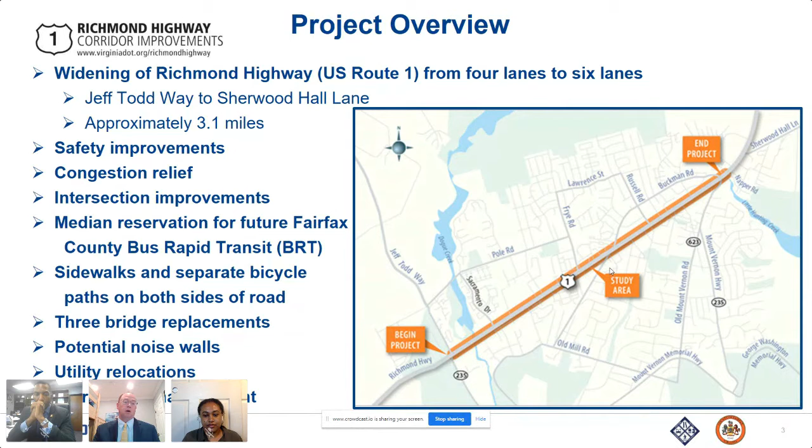It also includes separate sidewalks and cycle tracks on each side of the roadway. We're including 3 bridge replacements, potential noise walls, overhead utility relocations, and stormwater management facilities throughout the corridor.

So it was March 2019 that we had a design public hearing at Mount Vernon High School. Since then, we've developed written responses to all the comments that we got at the design public hearing. So thank you for anybody who submitted a comment. We've incorporated minor design adjustments from all the comments that we received from the public, as well as some internal comments. We have been out meeting with property owners.

This is a time for me to give a plug. If you have not had us out for a meeting and you're a member of an HOA or a civic group and would like to have us come out and give a presentation, please get a hold of me, and we are happy to do that.

We have been working on right-of-way plans for full property acquisitions, as well as conducting title research to lead up to notice to proceed on our right-of-way acquisition process. And we've been advancing the plans from the 30% level to roughly the 75% level.

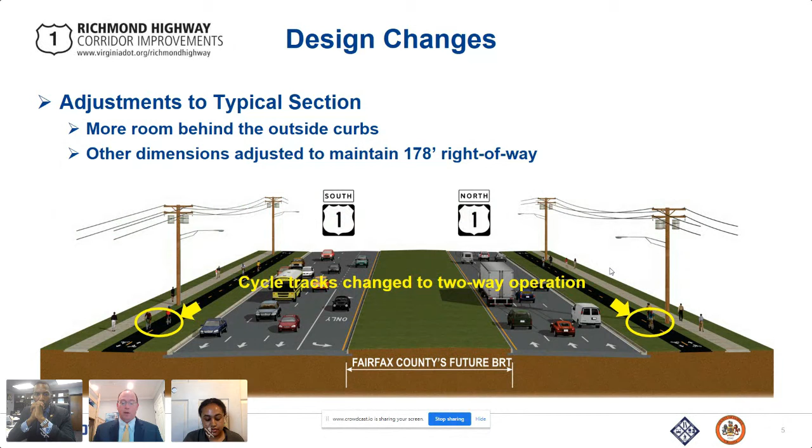So there's a couple design changes I want to highlight for you tonight. The first is one of the major comments we got at design public hearing was that single direction cycle tracks, one southern direction on the west side of the road and one northern direction on the east side of the road, was not sufficient, particularly if you were making short trips on a bicycle, like going to the grocery store. So we have incorporated that comment into the plans. So we now have one 8-foot cycle track on either side of the roadway that will be bidirectional.

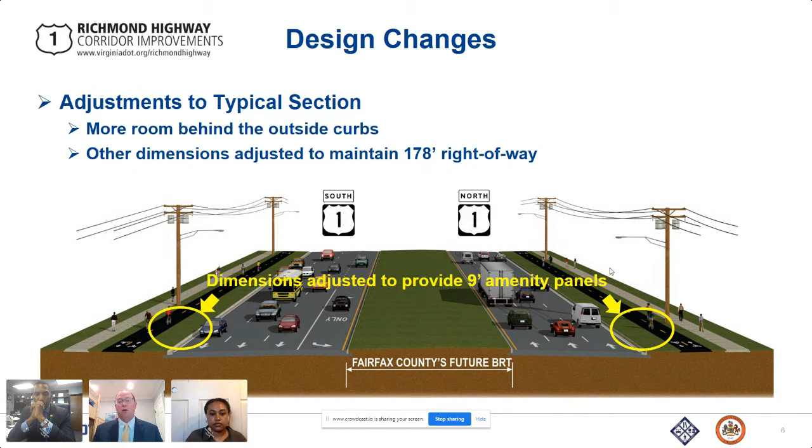Another change is in trying to realize the vision of the Embark Comprehensive Plan Amendment. We had 8-foot amenity or buffer strips behind the curb on each side at the design public hearing. We've expanded those to 9 feet to allow for larger trees to be planted along the roadway in conformance with that Embark vision.

I want to talk about some schedule revisions that have occurred since the last design public meeting. The project is roughly 1 year behind schedule as of right now. One of the major factors is we were anticipating receiving a finding of no significant impact last year. That did not happen, and that has been delayed, and that has impacted the rest of the schedule, particularly the start of the right-of-way process. So that's put us a little bit behind.

Going forward, as we've advanced the plans, we've looked at the right-of-way and utility relocations. What we showed at design public hearing was a high-level assessment of the parcels that were being impacted, and we based that on judgment. We had 3.5 years allocated in the schedule for right-of-way and utility relocations.

We have taken another look at that based on the additional information of advancing the plans to 75%, as well as some of the detail that's involved in some of these properties. And we've determined that 3.5 years just was not adequate. And it's going to take roughly 6 years for right-of-way and utility relocations to be completed if we proceed in the manner that we had originally proposed at the design public hearing. So that was not something that we were excited about. So we took another look at ways that we could recover the schedule.

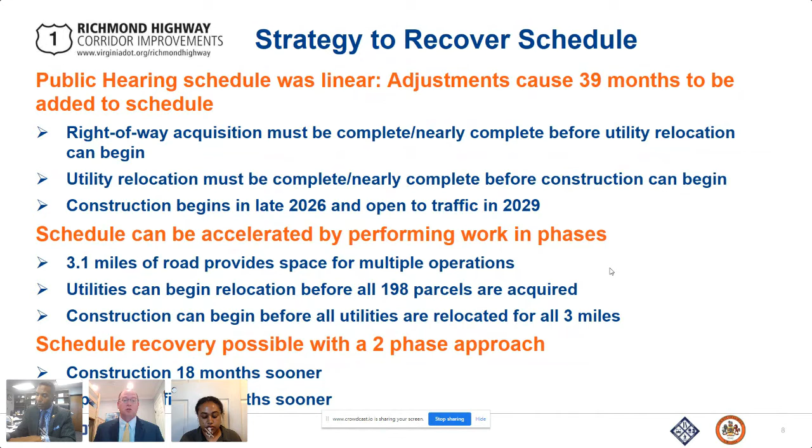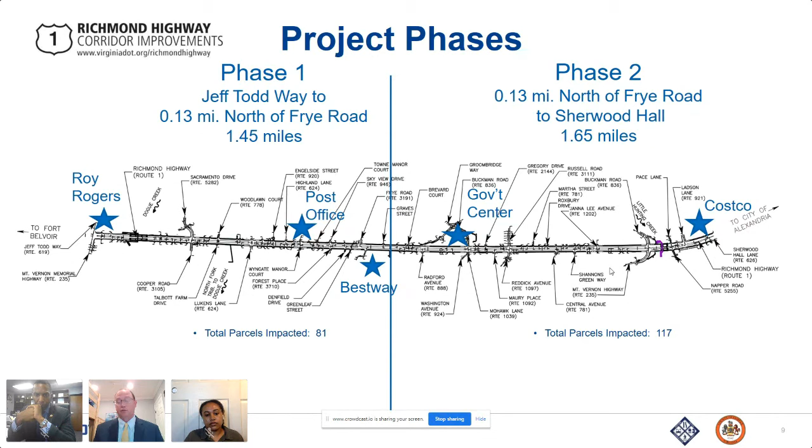So these are the 2 phases that the project will be broken into. Phase 1 is from Jeff Todd Way to just north of Frye Road. Phase 2 is from just north of Frye Road to Sherwood Hall Lane. They're both approximately 1.5 miles. You can see down at the bottom the parcels impacted in Phase 1. There's 81, and there's 117 parcels impacted in Phase 2. And so when we say impacted, that's some sort of right-of-way acquisition, whether it be permanent fee or temporary or permanent easement or just temporary construction easements.

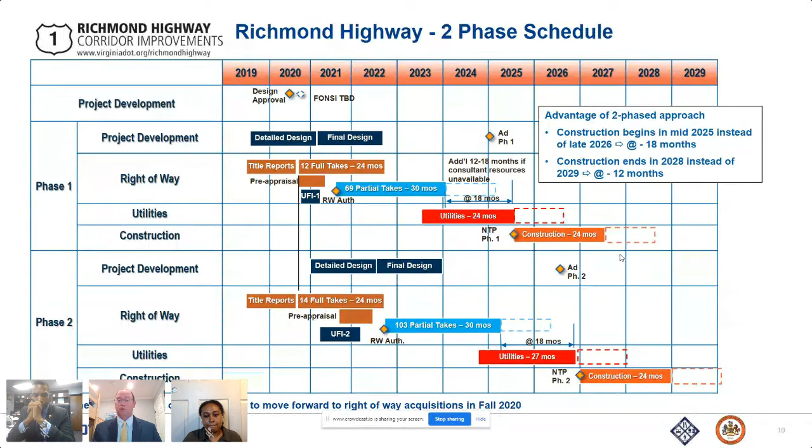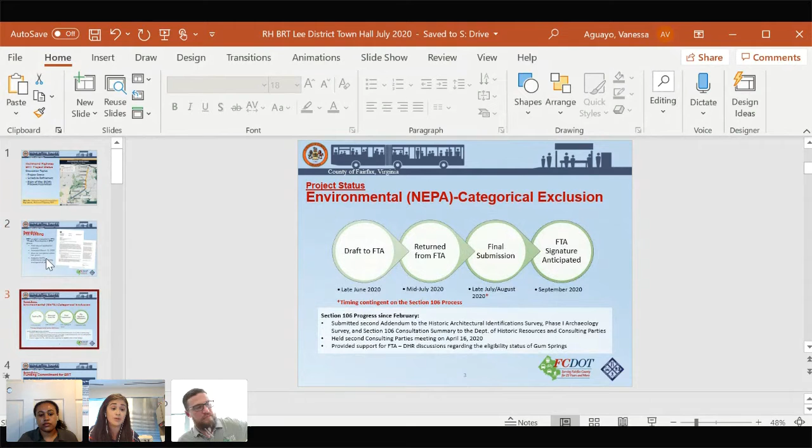Where we are with public involvement, we do have an email blast list that we use for anything related to the project. We did send out a newsletter on April 1st of this year, and given the health situation, we were planning to have a March-April timeframe meeting to talk about everything that's going on on Richmond Highway. That was going to include BRT, the VDOT Widening Project, and our Department of Planning and Development's urban design guidelines. But since that situation, we have deferred that meeting.

But now we're looking at other opportunities for virtual meetings. So whether we do something like this or a live or recorded presentation, we're looking to do something maybe in late July, and depending again on the health situation, potentially have an in-person meeting sometime early this fall.

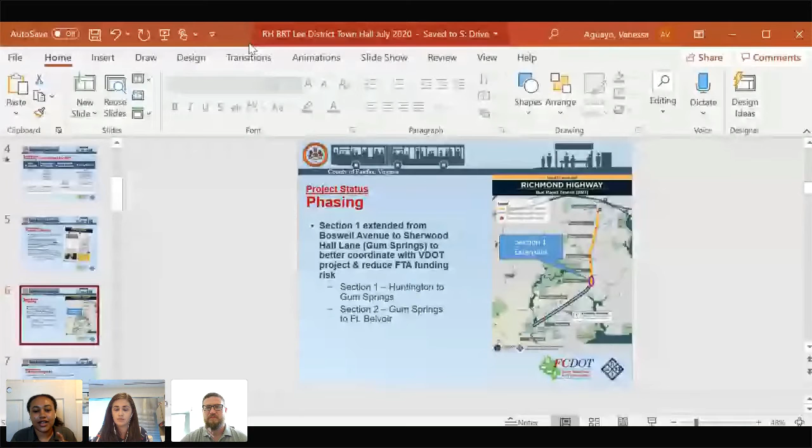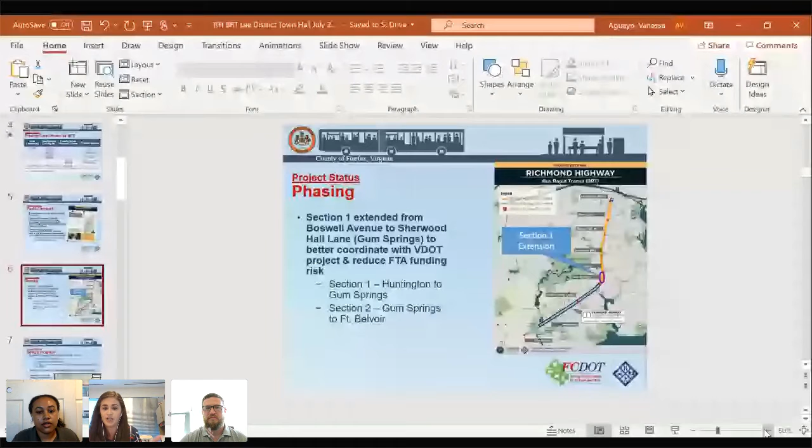Hey, Vanessa? Yeah. Sorry, I didn't mean to interrupt you, but could you make the screens full screen? I think the audience is having a little bit of a harder time. Yep. I could try. Is that better? When full screen, it wasn't letting me change it. Will it let you go into presentation mode? It got stuck last time, but I can try it again. Now it works. Okay, let's try that one more time. Okay, no problem.

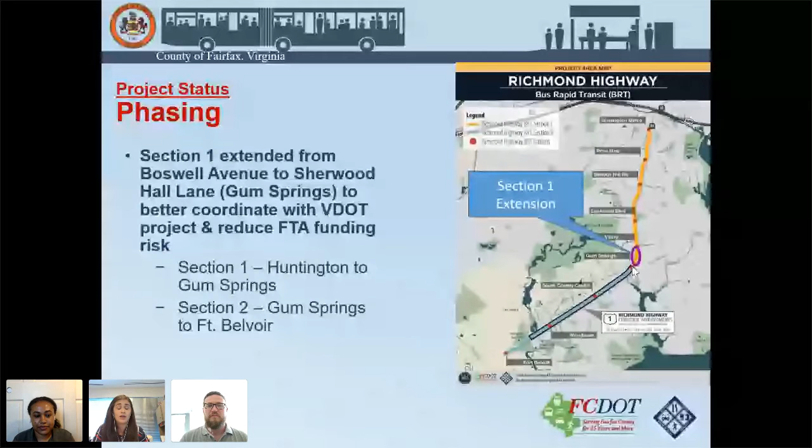So again, we were talking about sections, and originally through our phasing or sections, we were stopping section 1 at Hybla Valley. But since then, you can see here, we would have this little no man's land. So we've extended this section. So now section 1 goes all the way from Huntington to Gum Springs. You can see the cutoff here from the yellow to the blue, and then section 2 would go from Gum Springs to Fort Belvoir.

On design progress, we're hoping to have some updated roll plots in late July that we'll be posting to our website. Some of that will include design updates and feedback that we've gotten from the community. We continue to refine design, but we do want to post it and give everybody an update. We anticipate completing 30% design plans in late summer. The graphic at the bottom right is what the roll plots will look like, so you can better understand where the BRT lanes lay out, where sidewalks are, and the cycle tracks.

The other note that we shared with the community back in April in our newsletter is the final decision for the Hybla Valley Station. We were looking at different alternatives, I think we had 4 total. The decision has been made to go with option B, which you can see in this graphic to the right. Fordson Road will remain open and operate as it does today with full access. You can see both BRT station platforms. The southbound platform will be just to the south of Fordson Road, and the northbound platform will be to the north of Boswell.

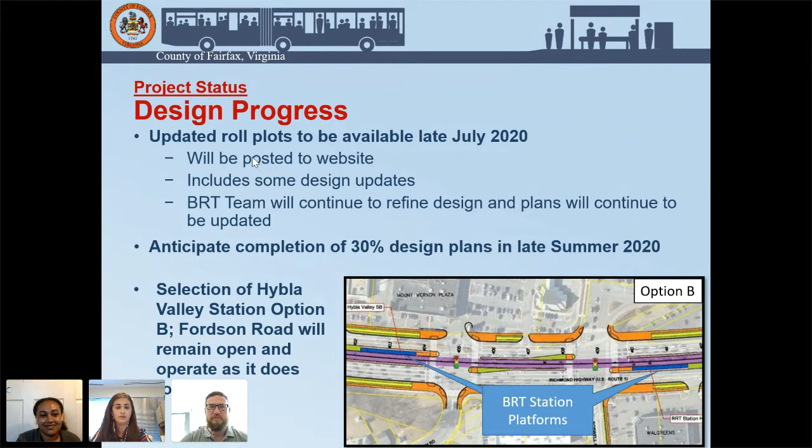Okay, so now we want to take a minute and talk a little bit about schedule refinement. Earlier in May, we did our first major rebaseline since our DRPT study. So what that meant is that, given decisions about project delivery and more information...

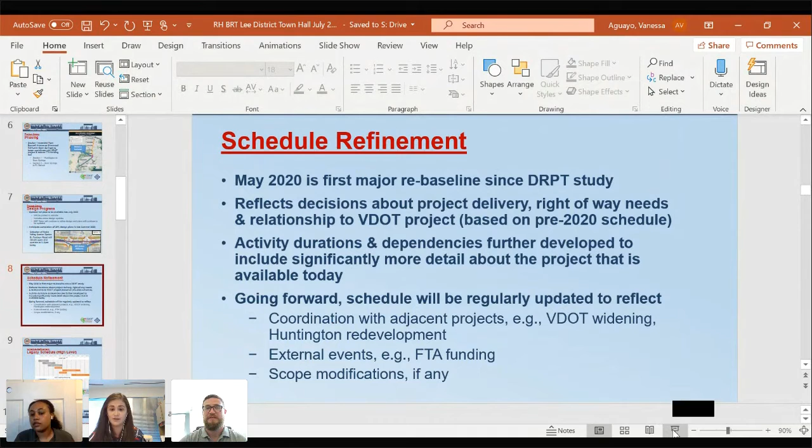Vanessa, we can't see the screen again. Sorry. Try that one more time. I know some people were having a hard time, but it freezes on me. Is this a little better? No, now it's showing up in your picture window, not on the main screen. There you go. That's better. If you can make it large again. Can you make it full screen again? It freezes on me, but we can try it again.

Okay. So schedule refinement. In May 2020, we did our first major rebaseline, with survey information and additional information we have now about the corridor. It gave us the opportunity to reflect some of the decisions we've made about project delivery, right-of-way needs, and the relationship to the VDOT project. This was prior to their latest 2020 schedule. Depending on activities, durations, dependencies, Dan spoke a little bit about that.

We have to move utilities in order to continue with right-of-way, so we had significantly more detail on that than before. That's why we took a minute to do schedule refinement. Going forward, our schedule will be regularly updated to reflect other things going on in the corridor, such as coordination with adjacent projects: the VDOT widening and the Huntington WMATA redevelopment.

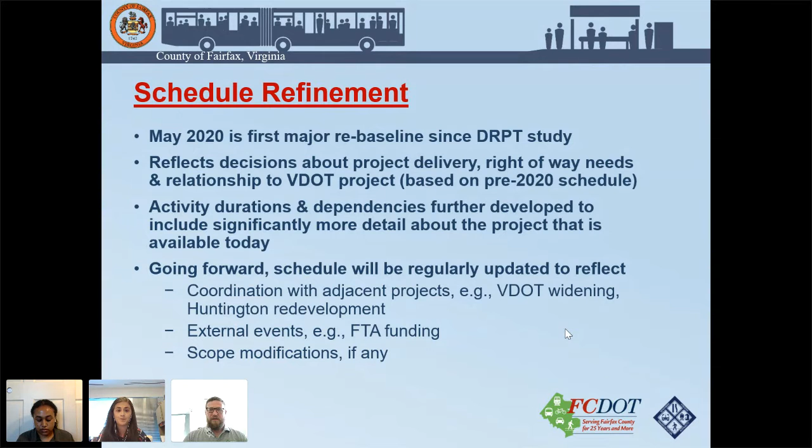We also have to consider external events, so some of that could include FTA funding and of course scope modifications, if any. So just to start at the same page, for those of you who've been following the project, we do have a legacy schedule. At a high level, when we first started the project with construction for section 1, we thought we could open by the end of 2026, and then section 2 in 2028, again based on the DRPT study that was finalized in 2015.

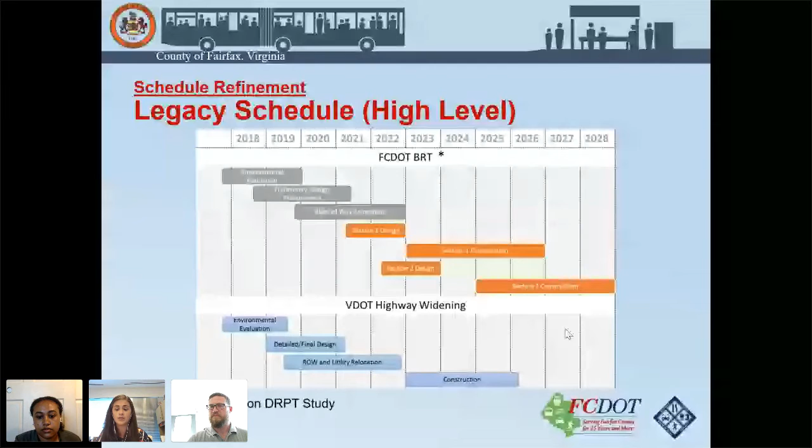So since then, what has changed? What other factors have contributed to this change? That's what we'll be going through right now. One of the biggest ones is NEPA. There was unanticipated time for the federally mandated consultation process. If you remember, I want to say back in 2017, maybe 2018, the federal government did shut down for a month or so, and that did push us back in all our review processes.

We talked about utilities. We know more now, so we need to allocate additional time for utility relocation. That includes Dominion, Cox, Verizon, AT&T. As you know, the corridor is very old, so a lot of those utilities are the same, and we just need a lot more time to coordinate that. Significant undergrounding: we found that especially in the northern part of the corridor, in the Boswell Avenue, North Kings Highway area, there's significantly more telecommunications that we now know about. Additionally, a large gravity sewer line requires a more complex design for the corridor.

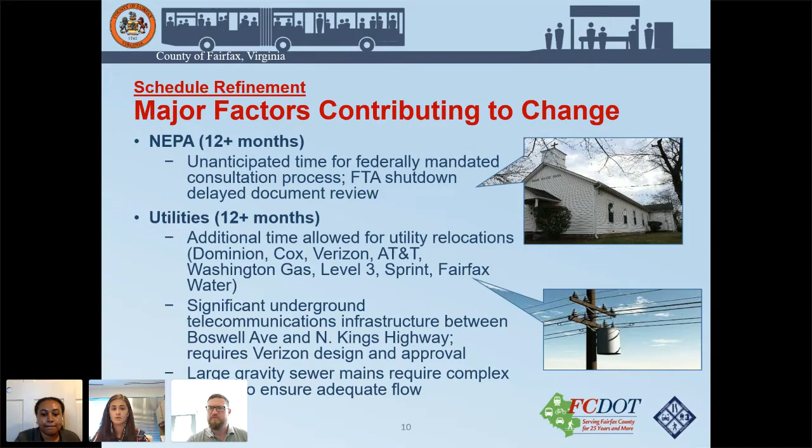Apologies, I'm having trouble again. I'm gonna have to restart this. Give me a second.

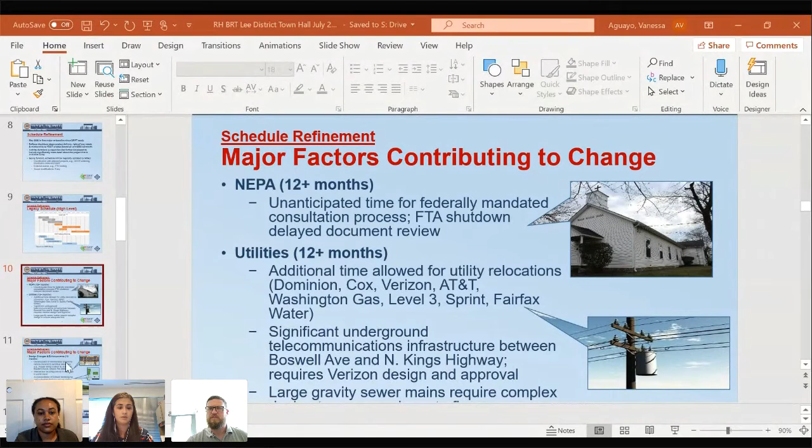Okay, design changes are another major factor contributing to the changes. We've had an additional 12 months to really look at design development, whether that be going back and minimizing to reduce impacts on sensitive resources, which could include Collard Street, Groveton Baptist Church, the historic fire station, just to name a few. There are various others along the corridor. The Fordson Road intersection is another one we've had to take a look at, all good information based on public input.

Accommodation of the Embark landscaping: Dan alluded to this a little bit, but we're making certain changes to the cross section on the side to make sure we can get the full vision, which includes big trees along the corridor. We are also looking to light the whole corridor, so that's taken some more of our time. And you can see here at the bottom also an enhanced stormwater management approach. While we know we need to handle stormwater, we want to do that in a way that it becomes an amenity to the community.

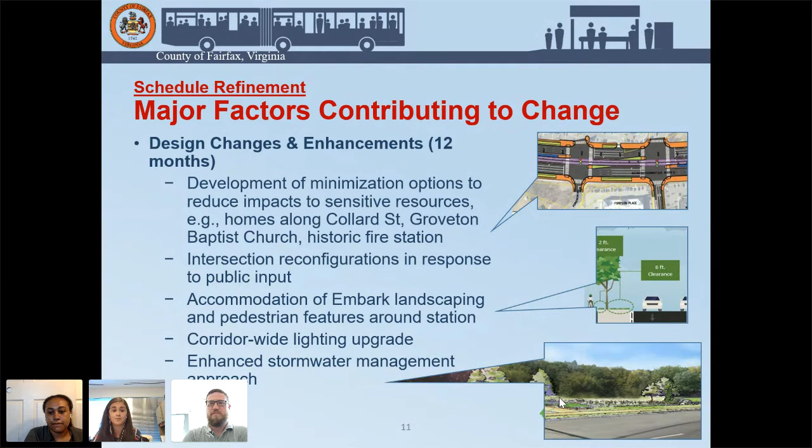The last two that we're going to talk about: right-of-way. Design development resulted in changes to property impacts that were not anticipated. To minimize the risk, what we've been doing, and we can talk a little more about this under Ricky's presentation, is shifting the partial acquisitions to a contractor. This project is going to be design-build. So full acquisitions will stay with the county, while partial acquisitions to further the design would be done down the line.

Construction sequencing, we touched a little on this: activity durations and dependencies. We need to finish one activity before we start the next. In this case, finishing right-of-way before we can move to utilities and finally to construction. That elongates the overall sequencing, and it resulted in a more realistic total schedule and durations for all the milestones we need to meet.

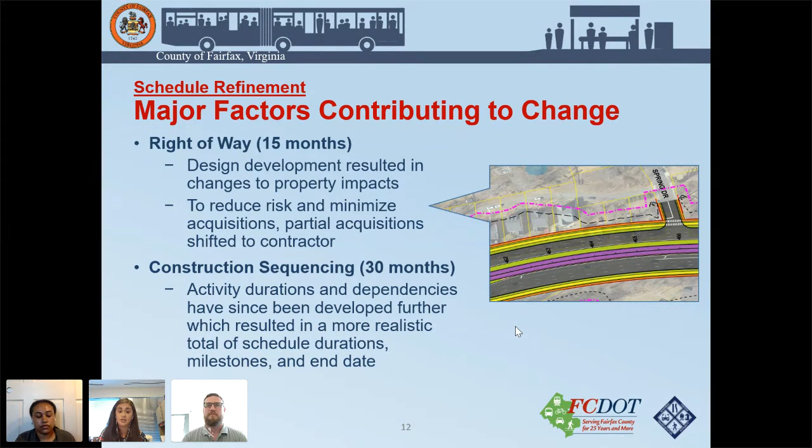So what does this do for the overall schedule? Hopefully you can see it here. We're about to finish our environmental review, which we just talked about; that's where the pink is. I won't go through it right away, as Ricky's going to do that a little more in time. But overall, what does that do to actually deliver the project? We're being extended to 2030 for the time frame of when we think we can deliver.

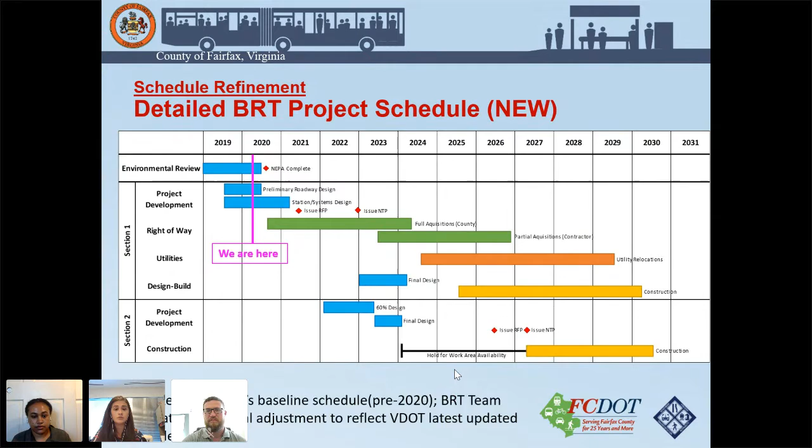So just like VDOT, we're also looking for opportunities to reduce the schedule. So one of the opportunities we're looking at is maybe starting partial acquisitions prior to final completion to move that schedule along. We're going to be seeking input from contractors through an industry review to see if maybe there's things that they can see that we haven't thought of that can move the schedule along.

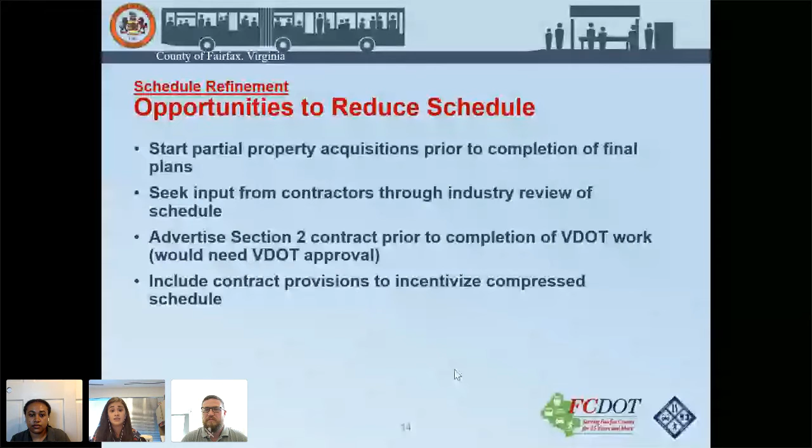Another potential, but again, this would need a VDOT approval, is to advertise section 2 of our contract for BRT prior to the completion of VDOT work. And then finally, there are incentives other projects use, in this case, contract incentives that could compress the schedule.

With that said, we still have ongoing risks to the project. So one of the big ones is right-of-way acquisition and relocation, utility coordination. As we've talked, there's many utilities on the corridor, the schedules for adjacent projects. I think Dan talked a little bit about this, but just if there's a delay on his, that obviously affects our project. Hazardous materials mitigation, that all has to be completed before we can actually do any of the construction.

There's ongoing agency coordination. So as I said, the project goes all the way to Fort Belvoir, so we need to make sure we're talking to Fort Belvoir, the U.S. Army, VDOT in general, and for environmental document, Department of Historic Resources. And there's also ongoing private developments that are on the corridor that we need to just make sure we accommodate and coordinate with.

So with that, I will now give the floor to Ricky to kind of go through a right-of-way process and acquisition. Thank you, Vanessa. Please proceed.

So the right-of-way acquisition process that we'll be following, we'll be following all of the FTA procedures and guidelines, as well as the VDOT process. As far as analyzing some of the property impacts, it should be understood that each property is unique and the impacts are evaluated on a case-by-case basis.

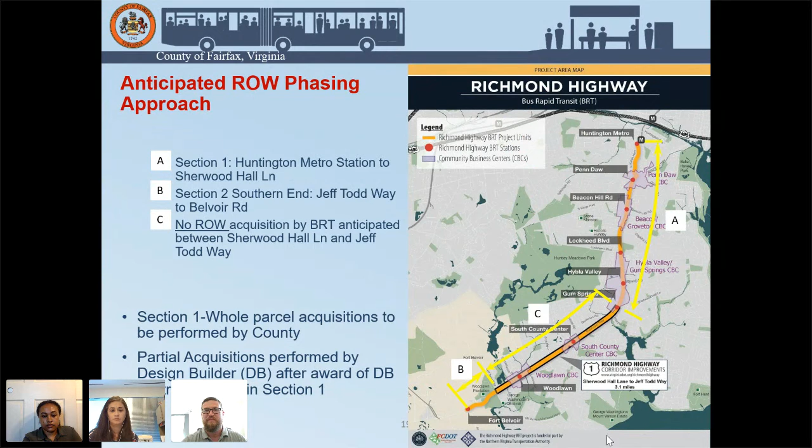So the whole parcel acquisitions will be acquired by the county, and then the partial acquisitions will be performed by the design builder as part of the design build award contract for Section 1. We're looking at the whole parcel acquisitions as sort of a rolling approach, and this was in order to make it a more manageable project and to streamline the process. Additionally, this would be in order to minimize the amount of times that we need to go to the Board of Supervisors for review and approval.

Some of the strategies that we are looking at for the grouping of these would be residential relocations taking priority. So any properties that have residences with property owners or tenants that need to be relocated would be in the first group. Second group, we'd be looking at sites that have potential hazmat conditions that would have a different schedule or longer lead time in the schedule for cleanup. And then commercial relocations with multiple tenants would be in the third group.

We're looking at developing an acquisition and relocation plan for each group, and subsequently an overlapping schedule, or as we've stated, sort of a rolling group approach. The second group would generally start before the completion of the first group, and the third group would start before the completion of the second group. Beginning times of the second and third group depend on the progress of the status of the first, second group, and other project milestones.

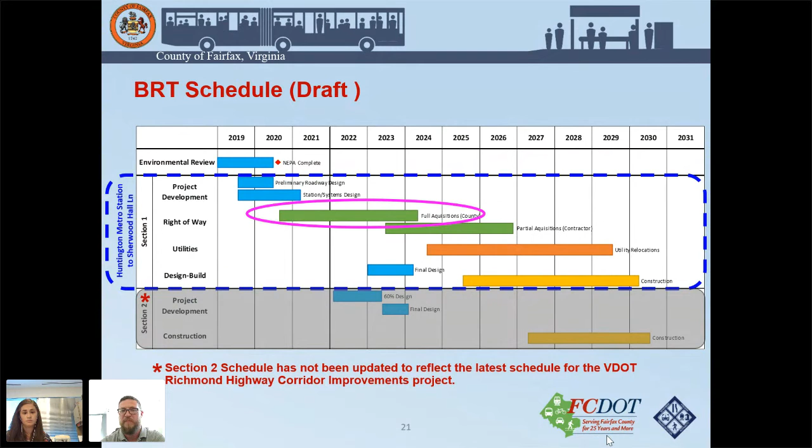But with that said, the design builder would then be taking over, after the whole parcel acquisitions, sometime in 2022 or 2023 for the partial acquisitions, and we would be finishing up some of the whole parcel acquisitions at that time as well. Next slide, please.

And then after that, I'm sorry. Sorry, Tricky. Yes, that's okay.

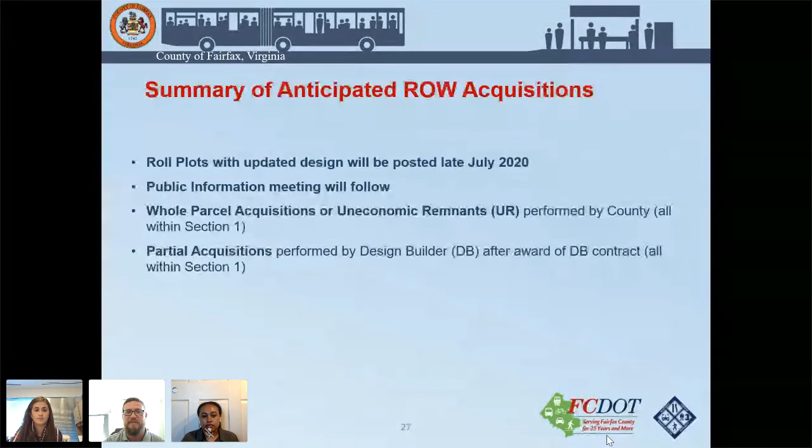Just sort of as a reminder, all of the whole parcel acquisitions and uneconomic remnants will be performed by the county, and they're all within Section 1. And then the partial acquisitions will be performed at a later date by the design builder. They're also within Section 1. So I think that's all we had.